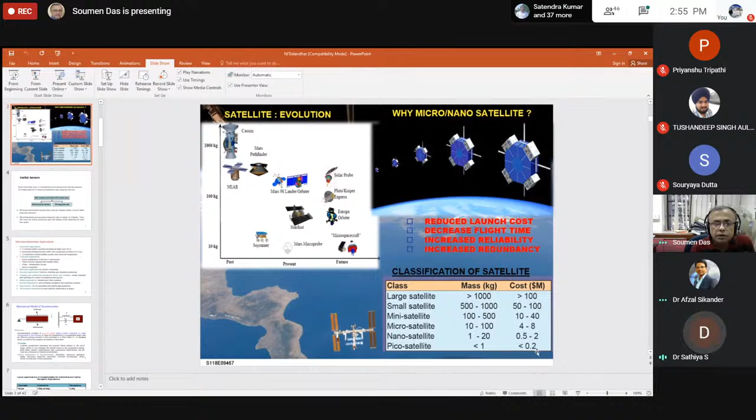Is it moving now or not? No sir. Then what happened? Is the slide available to you? Yes sir, slides are visible, but it is still on the first slide only, it is not moving. Is it now? Yes sir, it is moving now. But it is not in slideshow mode. That's okay sir, no issue, no problem. Sorry, I could not hear because I have some problem with my speaker also, that's why I kept it outside. Anyway, I hope these things are fine now. Where will I get my pointer? Here I will not get my pointer, I'll move my cursor instead, you can see my cursor movement. Yes sir, we can see it now.

So the inertial sensors I was talking about are mostly of two parts: one is the accelerometer, another is the gyrometer. The accelerometer measures the acceleration of a moving system, and from that you can get the velocity and also the position. Whereas the gyrometer, or gyroscope, measures the rate or angle of rotation. So any system that rotates, to measure the rotation, you have to put a gyrometer.

So any missile, when it is launched, it has a projectile motion, and along with that it also rotates, so it also needs a gyrometer. And for the satellite, when it is moving, there also you need to measure the rotation speed. But today I'll only talk about the accelerometer.

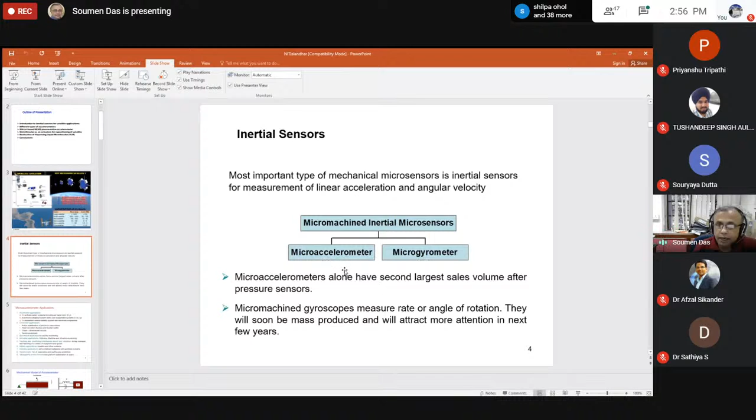Now coming to the accelerometer applications, there are different applications. The first one is the automotive application, where it is the airbag. In most current up-to-date four-wheelers, you have an airbag, deployed for safety purposes. Airbag deploys when there is an accident, because an accident means there is a sudden, very sudden acceleration, and that acceleration I am denoting as 50g.

G is the acceleration due to gravity, and 50g is 50 times that. Otherwise, when a vehicle has velocity or acceleration, in most cases it goes up to a maximum of 2g, even at very high speed. But when there is acceleration or deceleration in accident mode, it goes to 50g to 100g.

So the airbag is connected with an accelerometer sensor, and that sensor will only sense when there is 50g. Otherwise, when the four-wheeler is moving, it always has some acceleration, but due to that normal acceleration, the airbag will not deploy. It will only deploy if the sensor senses 50g. For normal acceleration and velocity measurement, you will have another accelerometer sensor with a different specification, but for the airbag, it is specified at 50g or 100g.

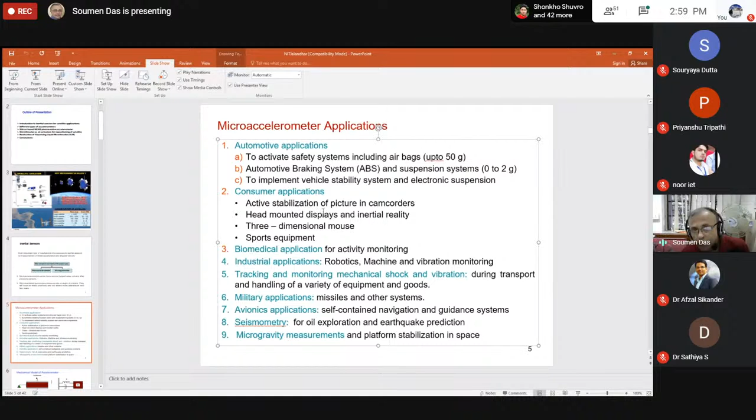Then you have consumer applications for active stabilization of the picture in a camcorder. When a video is being taken, there must be some acceleration, and to get stabilization and good quality video picture, you have to put an accelerometer. Similarly, you have many other things: three-dimensional mouse, sports equipment, and for biomedical activity monitoring, you need an accelerometer.

In industrial applications, avionics, and military applications, for example in different missiles, when a missile is launched, it monitors in real time its position and rotation. Then from the control room, through a feedback mechanism, you can control the missile, making it a guided missile, so that 1,000 kilometers apart, it will target exactly within 1 meter by 1 meter precision. All this is possible if you have sensors.

Seismometry, microgravity measurement, various applications are there. So when I am talking about 50G for airbag deployment, or when I talk about the satellite, it will have 10G. G you can understand, this is the acceleration due to gravity, and 50 times of that.

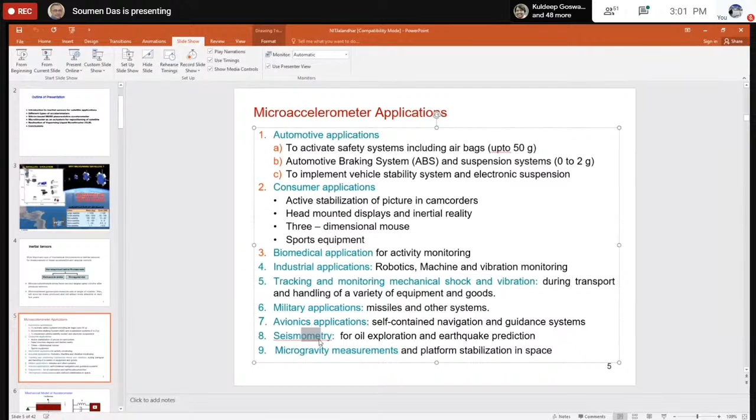Now, when you design the sensor, I should know what specifications you need. Accordingly, I'll choose my devices. Coming to the mechanical model of the accelerometer, just I have shown it here.

If it is a capacitive sensor, for an accelerometer you have a proof mass. Proof mass means it is a heavy mass compared to the other components of the device. So I can take this as a heavy mass. And this mass is suspended through a cantilever.

So if I take a mechanical equivalent of the accelerometer, you have a heavy mass connected with a fixed system, that means you have a spring. Okay, and here through this cantilever, it is connected to a fixed beam.

Mass is suspended, but it is connected to the system. So the system is moving, and I have to measure the acceleration of this system. Wherever I put the accelerometer, the proof mass is suspended there, but by some mechanism it is connected to this system. When it moves, it will generate forces on the proof mass, and because the mass M is very large, a force will be acting on the whole system, and because of this force, I'll get that acceleration.

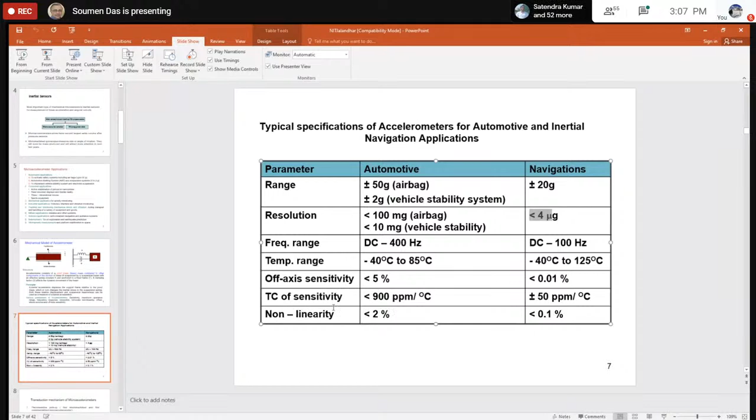But because of the mechanical design of your system, it will sense the other two axes also. The acceleration or output of those two components should be minimized, and that is known as off-axis sensitivity, which should be less than 5% for commercial applications, and 100 times less, or two orders less, for defense or navigation applications. There is also TC, temperature coefficient of sensitivity or non-linearity.

Moving forward, there are different transduction mechanisms: piezoresistive, capacitive, tunneling, resonance, and optical. Piezoresistive pickup means that silicon, being a semiconductor, is a piezoresistive material. That means if I apply a force or pressure, the resistivity will change. That is a piezoresistive material. Silicon is a very good piezoresistive material, and I will utilize that property for making an accelerometer.

Then you have a capacitive accelerometer, where the capacitance changes. And then you have a tunneling accelerometer, using tunneling current pickup. This is one kind of transduction mechanism used to measure microgravity, micro G, 10 to the power minus 6 G. In that case, piezoresistive or capacitive sensors will not work; you have to go to a different mechanism.

That's why you have resonant frequency based devices. Any mechanical structure will vibrate at its resonant frequency, where vibration, energy dissipation, and coupling will be maximum. Based on that, I can make an accelerometer, a sensor. And those sensors are available.

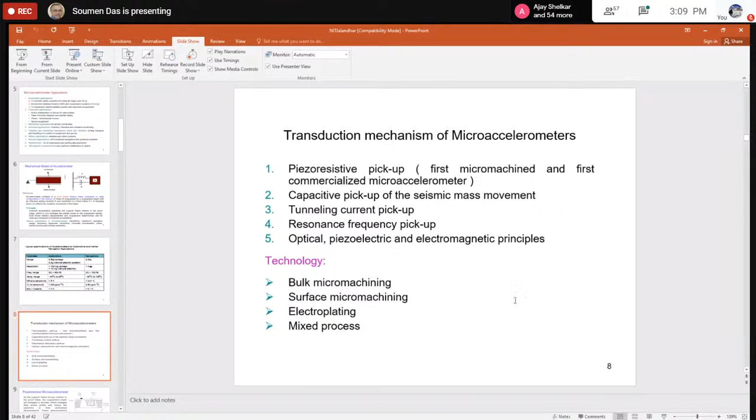Other than that, you have optical and piezoelectric sensors also. There are several technologies used for making these types of sensors: bulk micromachining, surface micromachining, electroplating, and similar processes. Coming to the piezoresistive sensor, let me give you an outline of that.

This is the cross-sectional view I have shown you. Here is a cantilever, and at its free end you have a proof mass. The other end of the cantilever is fixed to the system, and this whole system is moving. I want to measure the acceleration of this system, and I have kept this accelerometer connected through the cantilever to the frame. A heavy mass is suspended at the free end of the cantilever. This structure has several advantages and disadvantages.

Now, what will happen if there is acceleration or deceleration? That means the whole system is moving in an upward direction in the Z-axis. So the entire system will move, but since the proof mass is in a suspended condition, it will not get that inertia, so it will try to remain in its original position, while the frame has moved up.

So there is a bending of the cantilever, and because of this bending, a stress will be developed at the fixed end of the silicon material, around that corner. The stress is proportional to the bending, or the displacement, and eventually to the acceleration. Now, if I put a resistance under the maximum stress region, its value will change because of this stress, and measuring delta R, this delta R will be proportional to the force or acceleration of the whole system. So this is the piezoresistive accelerometer.

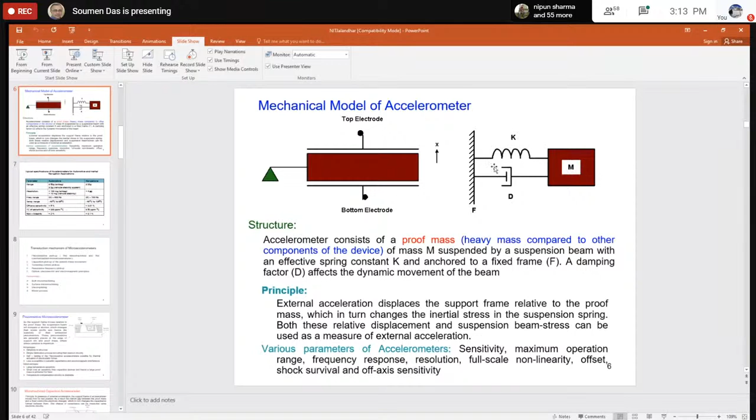Coming to the capacitive accelerometer, how does it work? Just like this principle, mass and spring. In the piezoresistive accelerometer, you have a mass and a spring. Similarly, here also I have a mass and a spring. A heavy mass is connected to the frame using two cantilevers. Instead of one cantilever, I have used two cantilevers. And at the proof mass, at this end, you have made two electrodes, which act as a capacitor, and at the bottom also. So you have two capacitors, one at the top and another at the bottom.

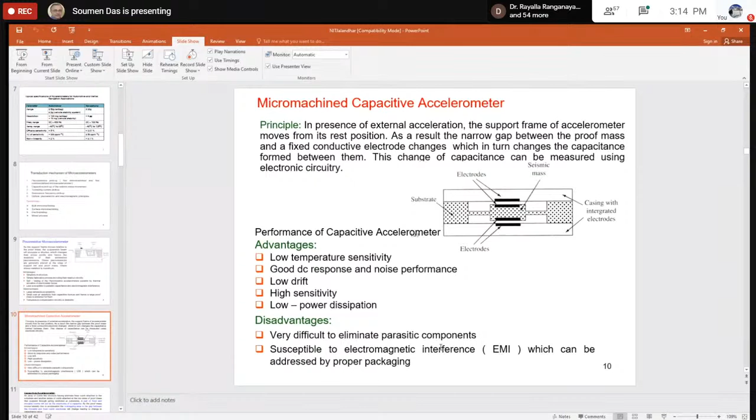And now, if the whole system moves, this proof mass is suspended, and if there is an acceleration along the z-axis, the proof mass will move either upward or downward. So the gap in one capacitance will decrease, the other will increase, and you will get a delta C value. If I can monitor the delta C, I can get the acceleration. This is the whole idea of the capacitive accelerometer. It is very sensitive and requires very low power consumption. But there is a disadvantage: electromagnetic interference, and parasitic components you have to remove.

As for the details of the piezoresistive one, I'll talk about the project we did successfully with ISRO. Before going to that, for the capacitive accelerometer, I'm giving you some examples of how I can make this capacitor. Here you can see a comb-like structure. This is not our work, I have taken it from the literature; people have worked on it around the globe. So here is one type of capacitive accelerometer. This is the design. The entire red-colored part is a comb-like structure and it is suspended, but it is anchored at these 4 points.

This is the actual image of the device. Here is the anchoring position to the substrate; otherwise, the structure is suspended. You can see there is a gap between the substrate and the cantilever. And these are the comb structures; you can see the magnified view. So there is the cantilever and there is a mass, this is the heavy mass. And the green ones are the fixed plates or fixed electrodes.

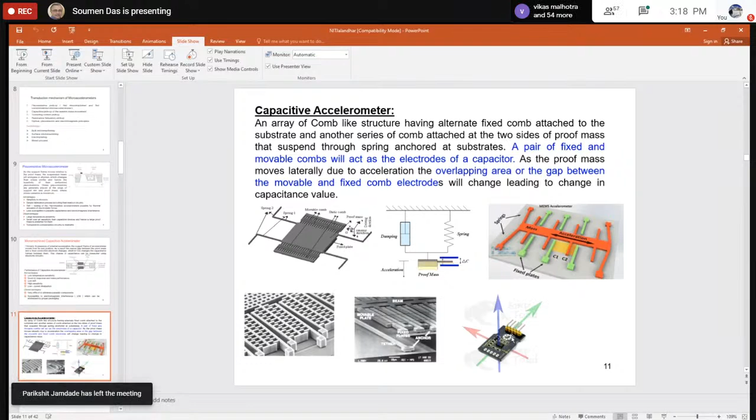Now I'll talk about the design and development of a silicon piezoresistive accelerometer using MEMS technology. Here is your silicon piezoresistive accelerometer. I have shown you the cross-sectional view, and this is the top view. You have a proof mass, and this proof mass is suspended by four cantilevers, four very thin beams. Here you can see the cross-sectional view. Okay,

and the whole system is connected. This is the sensor. The whole system is connected to your bottom plate, and the top plate is covered by the packaging process. It is connected to the entire system for which I want to measure the acceleration. It can be a launch vehicle, it can be a satellite. When there is acceleration, the system will move, but this proof mass will not move. Because of the inertia, it will not be in phase with the frame. So it will bend. Because of the presence of this cantilever, it will bend like this.

And here, instead of having one cantilever, I have put four cantilevers to make a mechanically stable system. If it is one, then if there is a force in the other direction also, there will be torsional or rotational bending. Because of that, there will be off-axis sensitivity. I want to measure the z-axis only, not the other directions. But the mechanical design is such that it also senses the other axis. So I have to make a rigid structure in the other axis, and for that, instead of only one beam, I have put four beams so that it will be rigid compared to the previous one.

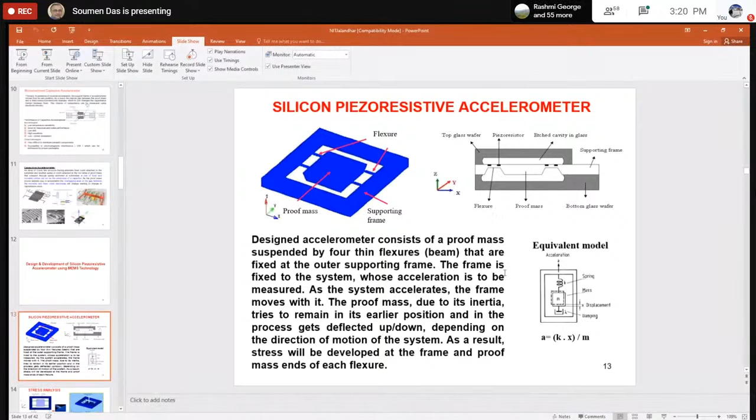So this is the whole concept. With this concept, we have designed it. You can see in ANSYS we have designed it, and if I give a force over here, there is a bending of the beam and stress is developed. In the red or green region, you can see there is maximum tensile and compressive stress, where I'll put a resistance. Because the entire chip is made of silicon, I have put a piezoresistor only at the maximum stress region.

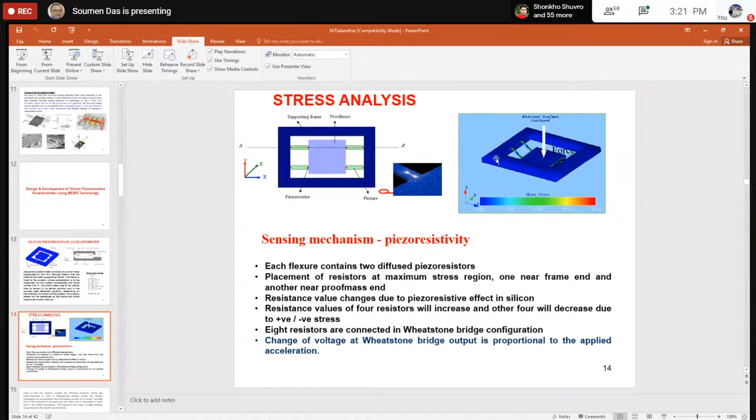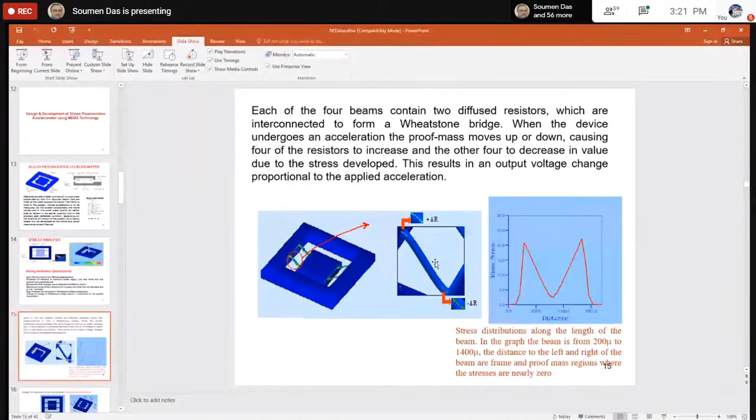Okay, so altogether you have 8 resistances. In each beam you have 2, one compressive and another tensile. You have 4 beams, so altogether 8 piezoresistors are there. With 8 piezoresistors, you can make a Wheatstone bridge circuit to get the output. Now, as there is bending, stress is developed at each corner of the cantilever, where you have the piezoresistors, so there will be a change delta R in the Wheatstone bridge. If I can measure the change delta R, I can get the force, or the acceleration acting on this sensor surface. This is the whole idea.

Details are there, and now come to the other one. In the previous case, my force direction is always perpendicular to the proof mass. That's why it is called a single axis accelerometer. This one is cross axis. Because of the mechanical design, I have chosen 4 beams to get more stability, but still it is not completely fixed in the x and y axis. If there is a force along this direction, it will bend this way. So there will be stress, and if stress is developed, you will get some Wheatstone bridge output.

That Wheatstone bridge output, although it is low, is not ideally 0. There is some practical value. The calculated sensitivity is about 0.943 ppm per G. That is 1.15% of Z-axis sensitivity. So it is not 0. I have to make it 0, and that is the challenge of your mechanical design.

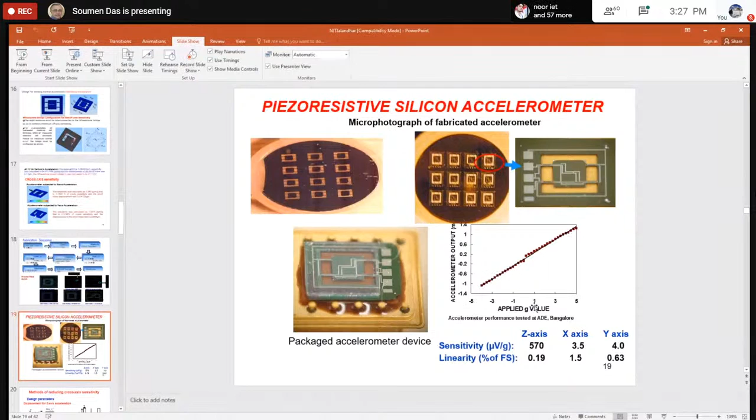Later on, we changed our design of the accelerometer to get the same sensitivity, because sensitivity I have achieved for the Z-axis, the prime axis, whereas the off-axis sensitivity is quite large. I have to suppress it. After the first phase of iteration, we understood that there is a problem in the mechanical design, and because of that you are getting very high sensitivity in X and Y. Although the sensor works in the electrical domain, we have to understand the mechanical design.

MEMS sensors are interdisciplinary in nature. You need knowledge in different domains: physics, chemistry, material science for making the device itself. For the sensor parts you need electrical engineering and electronics, but of course you also need mechanical engineering knowledge. So it is a combination of all. Now if you see carefully, for the displacement along the Z-axis, the formula used is this one.

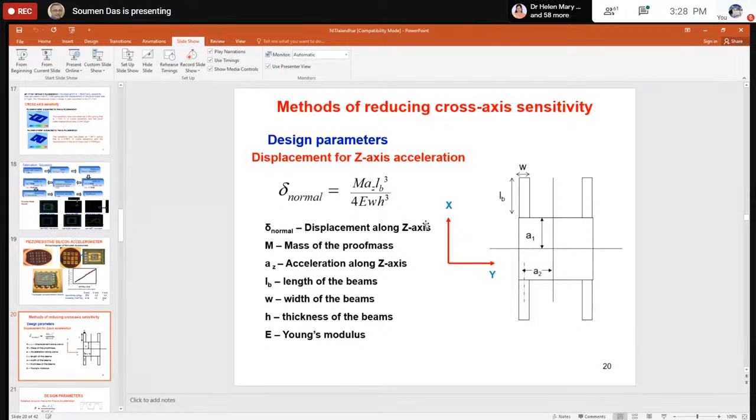But what about the cantilever? The cantilever, as I told, is very thin compared to the proof mass. The thickness of the cantilever is only 10 micron, and its CG is here. Whereas for this case, CG is here. So they are not in the same plane.

Because they are not in one plane, if you give an in-plane force to the whole system, there will of course be a rotational movement. And that you have seen while you design for the off-axis. Because of the change of CG, you are getting these changes, and as a result, you are getting the off-axis voltage at the piezoresistive bridge.

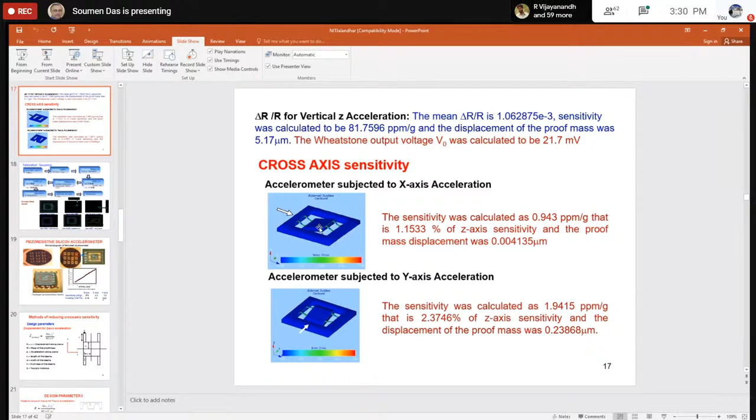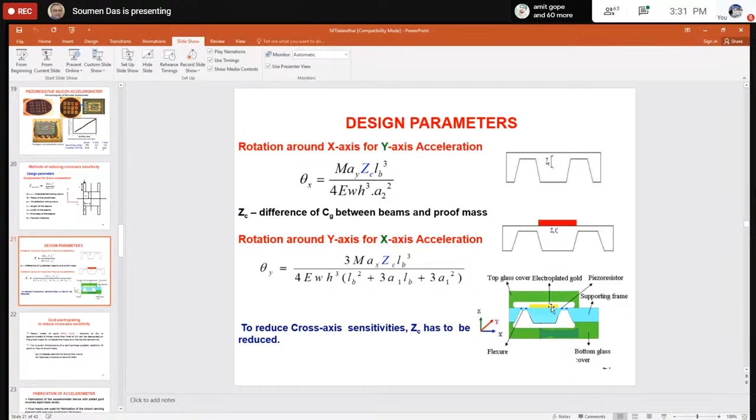And with that, the torsional rotation will be reduced, and you will get better off-axis sensitivity. That we did. After making the entire device, I put some extra mass made of gold on top of that.

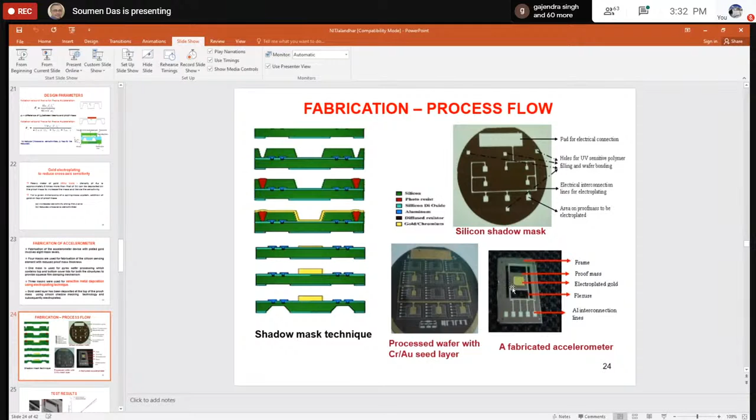Here these are the extra gold masses that we have put, and when you measure the off-axis sensitivity, there is much reduction. With structure and without structure, this is for the z-axis and this is for the x and y-axis. You will get a much reduction in the off-axis sensitivity.

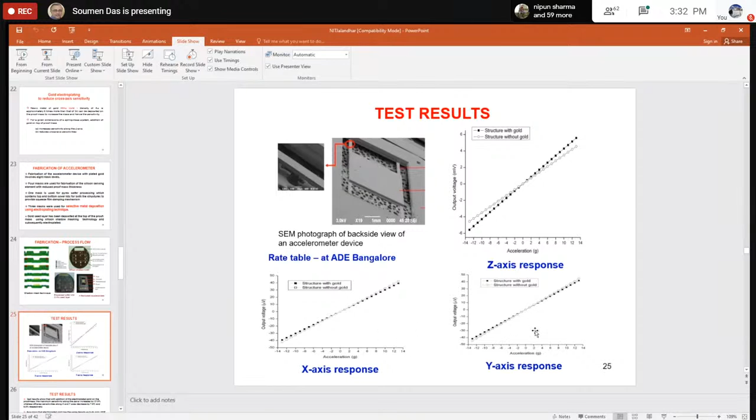And if I compare it, the sensitivity in the z-axis is 0.1 millivolt per g, but for the x and y-axis, it is 0.5 microvolt per volt per g. So by modifying your mechanical design, you can achieve this also. So with this, I complete my lecture on the accelerometer.

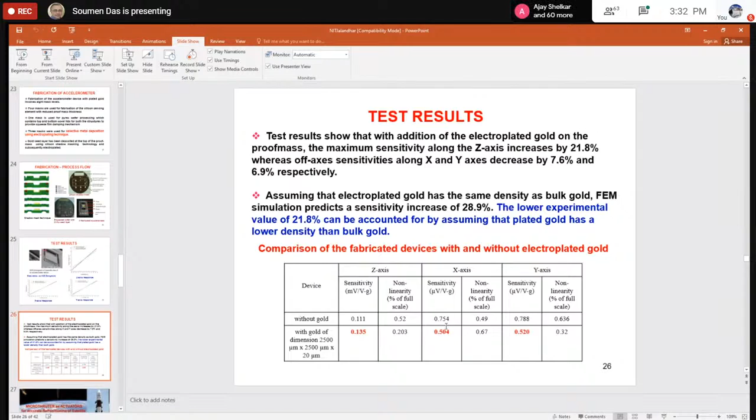And if you have some more time, just 10 minutes I'll take. I hope it is available. Yes, sir. Okay, you can continue. Okay, thank you. So now I'll talk about the actuator.

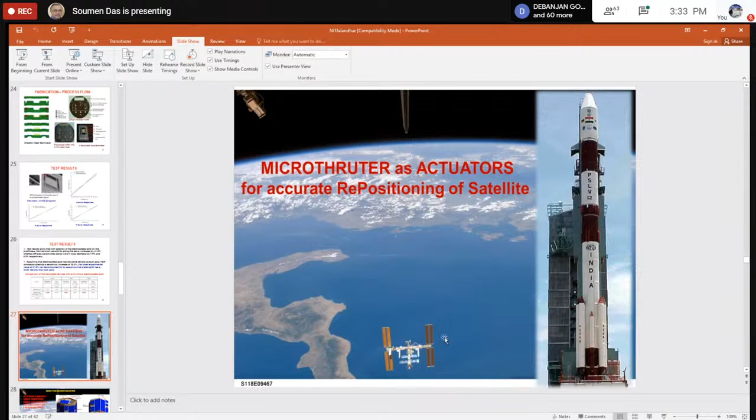As I told, a satellite is placed around the orbit. But because of various reasons, the satellite may shift; a drift is there. So I have to bring it back to this orbit, otherwise I will lose my signal. What way will I bring it? Whatever I do, I will do it remotely.

Basically, it is called a thruster, and it is a micro thruster. Why is it called a micro thruster? Not I, in general it is called that, and you will understand in the next slide. There are various types of thrusters: ion thruster, Hall effect thruster, cold gas. I'll talk only about the vaporizing liquid microthruster, VLM.

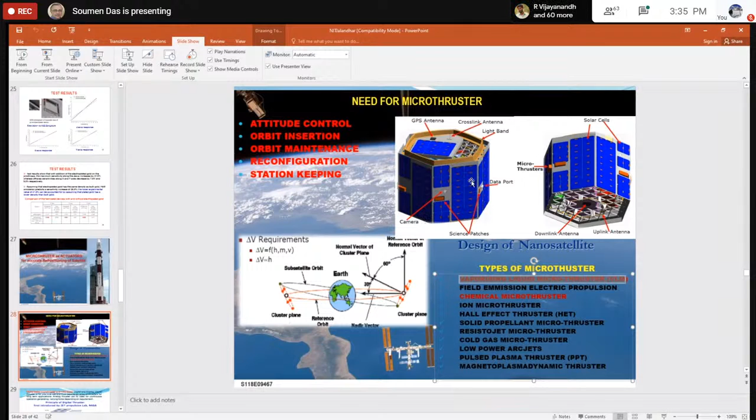With that thruster as an actuator, I can bring back a 10 kg satellite to its original position remotely. Let us move forward.

In this slide, I'll just talk very briefly about what we mean by the microthruster. Actually, this whole concept was first brought practically by the Jet Propulsion Laboratory of NASA in the USA, probably in 1998. It's a very simple concept, and of course countrywide we do it in our Diwali.

Think about that. I have shown you the 3 layers of material. Let us take it as silicon, or you can take it as glass. Three different glass slides, simple glass slides. In the bottom glass slide, you have put 4 thin film resistances. These are the 4 thin film resistances I can individually access. In the middle slide, you have made through holes, and the diameter is very, very small, 1 millimeter or 500 micron or 100 micron, but it is a through hole.

In the top slide, you have a diaphragm. These are the 4 individual diaphragms. Diaphragm means it's a very thin layer. The entire glass substrate is very thick, but the diaphragm is very thin. Once you make each individual layer complete, then you bond them all together in an aligned way. Aligned way means this resistor will be aligned with these holes and with this diaphragm. So you have a 2 by 2 array.

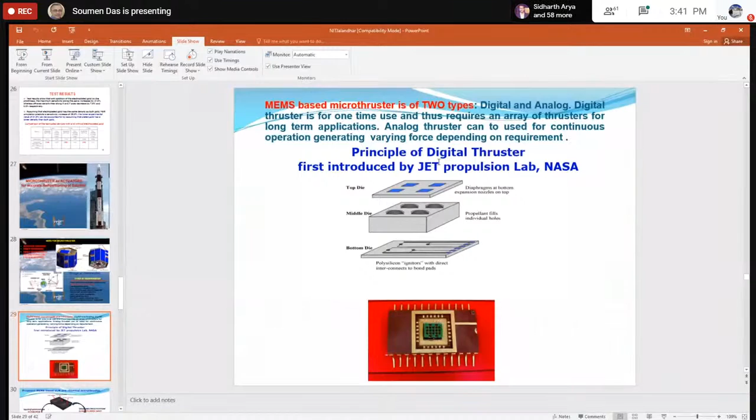Because they are in the vacuum, you need a very little force to move. That's why 1 millinewton is sufficient. And we have developed a range from 1 micronewton to 1 millinewton.

And there is a propellant. In the previous case, it was a solid phase propellant, dust powder. But in this case, I have used H2O only, water, as a propellant.

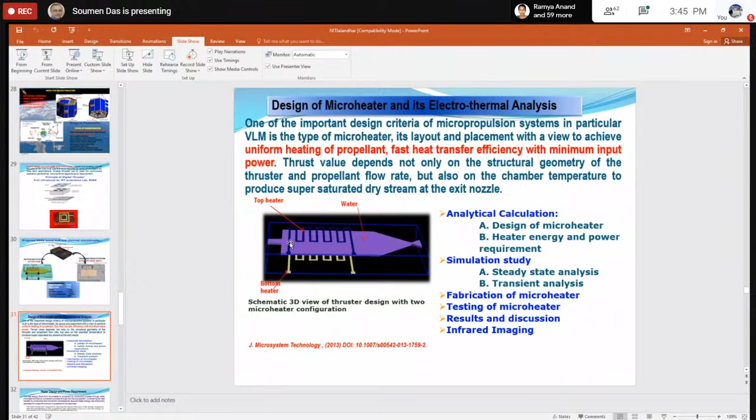More of this micro heater design, electrothermal analysis, is there. I'll just quickly go through this - this is all about the very basic concept of how the heater will be designed, how much heat is required. For that, different convection and conduction heat flow, thermal energy flow, is there, so you have to work on that.

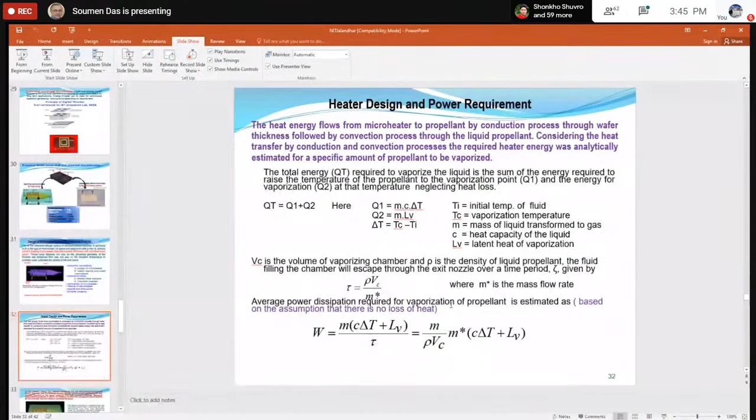And then from that you have to get what will be the electrical power requirement. Finally it is the electrical power requirement, and based on that, what is the resistance value finally. And that resistance will be embedded on the silicon surface.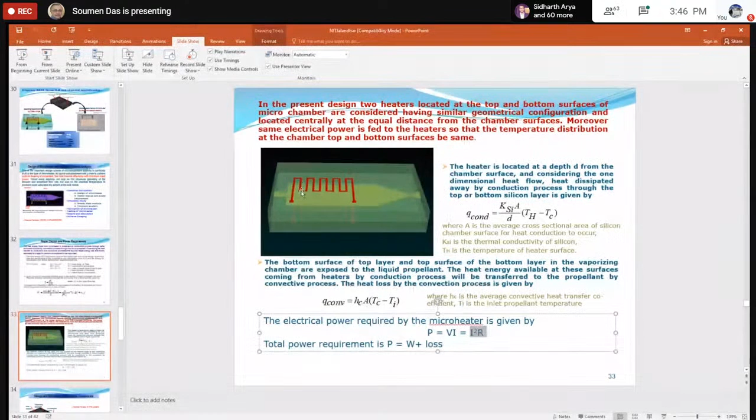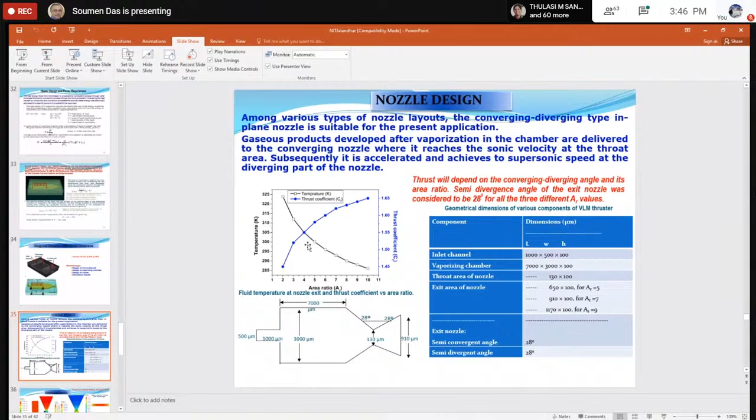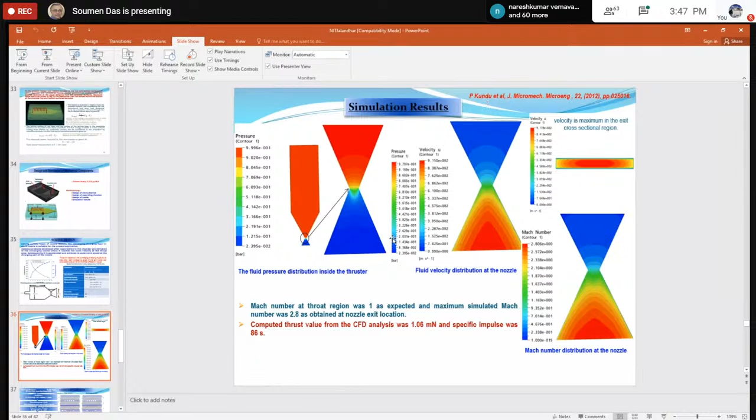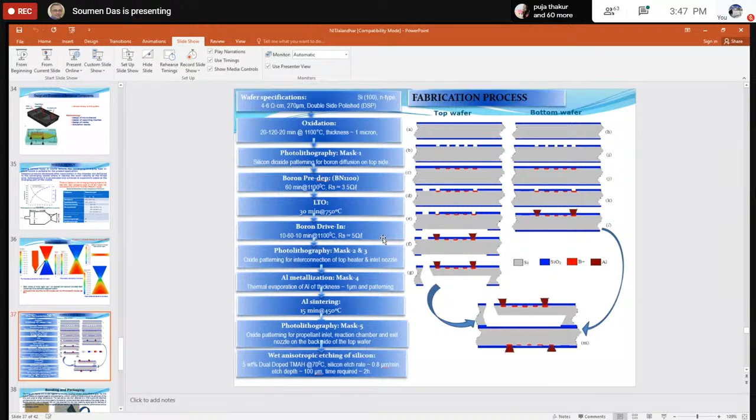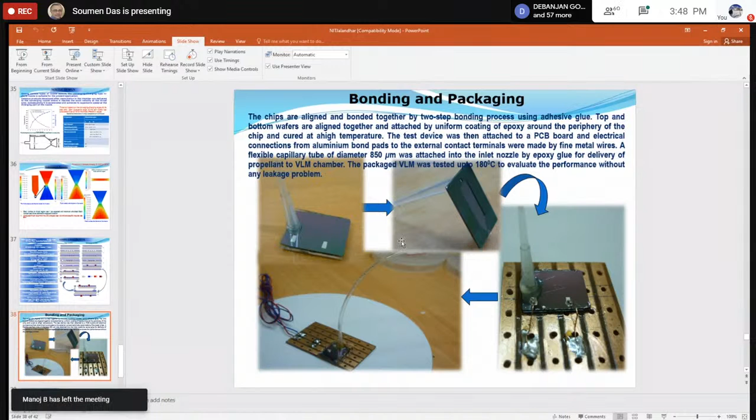And this is after your fabrication, and then you have to connect it. For the electrical connection, the resistance you cannot see because it is integrated, but you can see the electrical wires connected to give the electrical power, and to give the water in the inlet. This is the through pipe, and vapor will come. This side you have an inlet, and the other side you have a nozzle, where the vapor will come out. This is the whole concept.

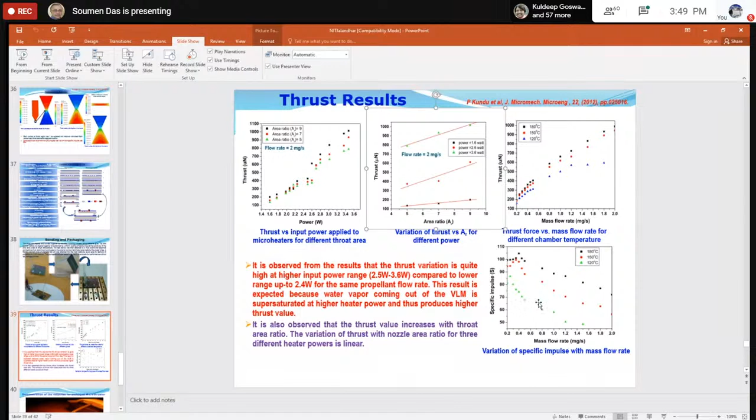Now, at the end, let me show you this. I do not know whether you can see it or not, let me check. Is it visible now in the slide? Is it visible? Yes, sir, it is.